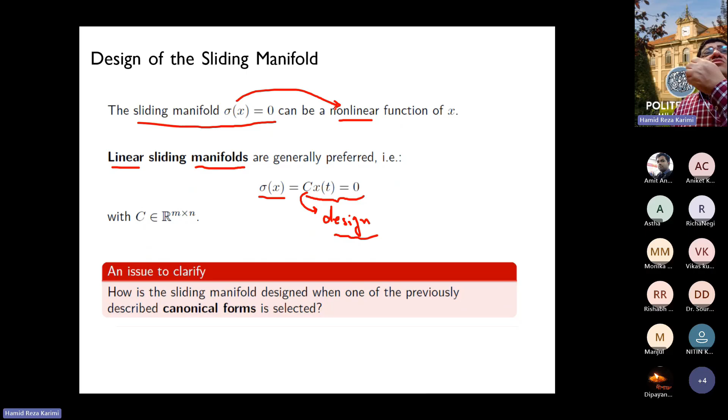There is one issue we need to clarify: how is the sliding manifold designed when one of the previously described canonical forms is selected? If you remember, we talked about four types of canonical form in our lecture before. Now the point is, if you have one of these particular canonical forms, how can this sliding manifold be designed? This is one question.

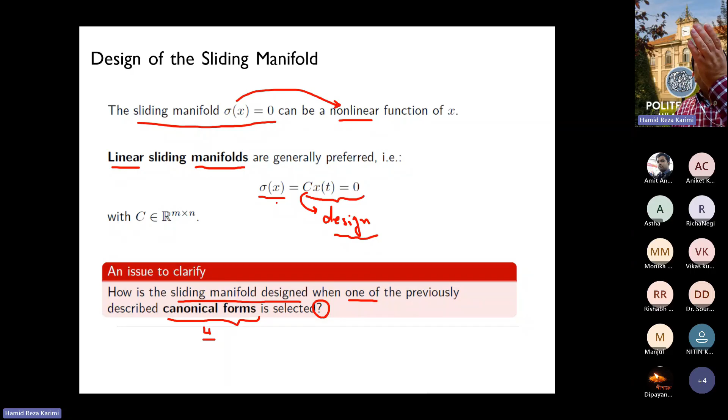Basically this question means you are talking about some classical control design, such that you have a canonical form in the system model, in the dynamics, and you try to design the sliding manifold based on this strategy. So in this case, let's look at the design of sigma x for the canonical forms, starting with the reduced form.

You remember the first technique we taught was the canonical form in the shape of the reduced form. We know that if you look at the state vector, it can be split into x1, x2 — so your vector x can be represented like x1, x2. You can split it into two parts, and then you can design sigma x like this: sigma x is composed of x1, x2. And remember that sigma x should be C multiplied by x.

This was the linear shape. So now x is x1, x2 — this is x1, x2. And the matrix C can also be partitioned into C1, C2. Therefore, this could be the representation.

Okay, but if you're doing this, you want to reach the reduced form as a function of x1. So remember that the reduced form should be in the function of x1.

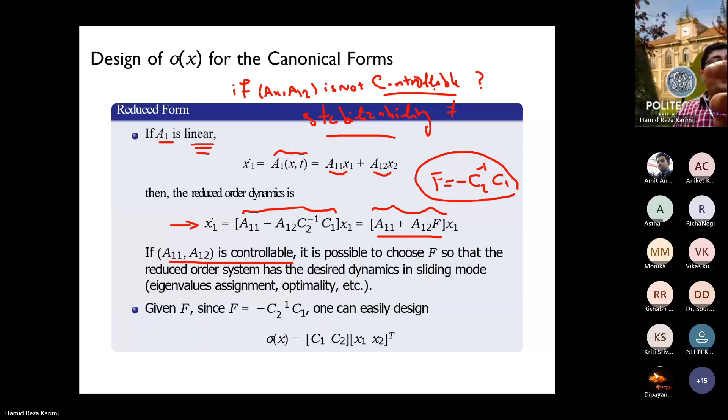Controllability means this matrix A11, A12 should follow some rank formulation, as you know from the control course. If this controllability matrix has complete rank, the system is fully controllable. But if it's not controllable, you need to check stabilizability.

I can give you one example of what stabilizability means. Assume you have a function G(s), equal to 1 over (s plus 1) multiplied by (s plus 2). If you have such a transfer function and you find the matrices A and B, you can see that this system is fully controllable, so it's controllable, you can find it as controllable.

But if I give you another function, for example G(s) equal to (s plus 1) over (s plus 1) multiplied by (s plus 2), this transfer function simplifies to 1 over (s plus 2), because s plus 1 cancels out. So what happened here? This system is not controllable.

Why? Because S plus 1, so it says that S minus 1, so this mode is not controllable. It means that this mode you cannot control.

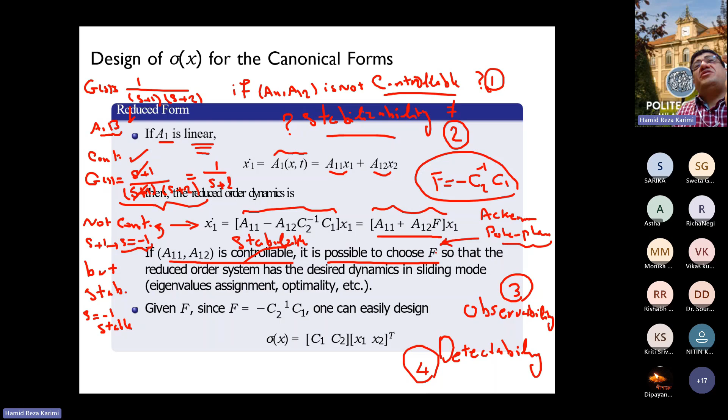So now when you choose F, you have two parameters, C1, C2, then it's up to you how to choose C1, C2. Based on C1, C2, then you will get the Cx. So sigma x is the design. It means that you can design it, you can construct it. So this is the main idea, the main philosophy for choosing sigma x for the reduced form in the canonical form.

Okay, so another form was the controllability form. You remember that the second canonical form is the controllability form. So what does it mean? If you remember, in the controllability form, the system can be split into m subsystems.

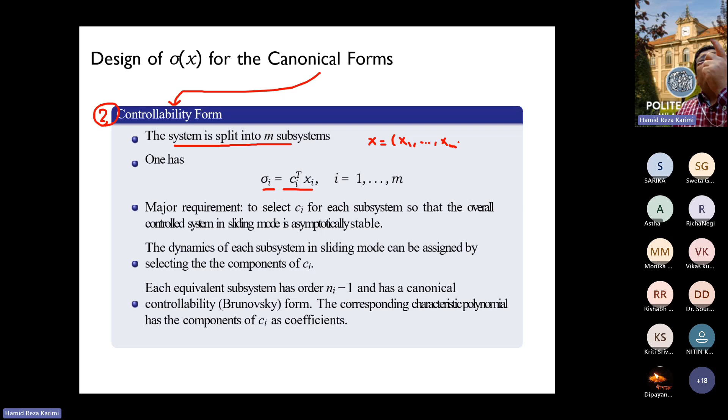It means that you can split the system into several subsystems, for example m subsystems, and then sigma I. For each subsystem from 1 to m, it can be designed from this formulation, Ci transpose xi. But you need to remember that here the vector x can be composed of several, x1 up to xm. So this is several subsystems.

And then each x1 has a dimension n1, for example, and xm has another dimension like nm. So now the whole dimension should be equal to dimension n for the vector x.

Okay, so now the point is the major requirement, how to choose CI, because here you need to choose CI for each subsystem. You need to choose CI such that the overall control system in sliding mode is asymptotically stable. So it means each subsystem should be stabilized, depending on the choice of CI. So the dynamics of each subsystem in sliding mode can be assigned by selecting the component of CI. Okay, so the question is how to choose the parameter of CI.

So now each equivalent subsystem has the order ni minus 1. It means that this is the order for each subsystem. So it has such an order, and it has a canonical controllability form. And then you can find the corresponding characteristic polynomial, which has the component of CI as the coefficient.

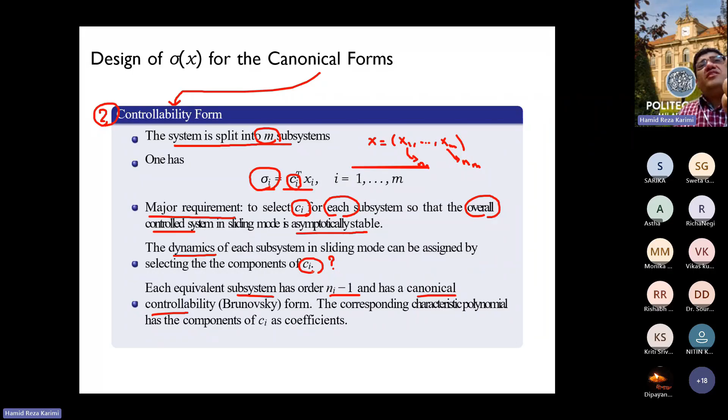Okay, so this is just the partitioning. You need to partition X into several subsystems, like m subsystems. And then for each subsystem sigma I, you need to find CI. So the question is not how to find CI, but you need to choose CI in such a way that each subsystem should be asymptotically stable.

Another form we discussed in our previous lecture was the decoupled input-output form. When we talked about this, you need to look at the degree of the system, and it's very similar to the case of the controllability form. The approach here is also very similar to the controllability form. You need to look at the relative degree R, meaning each subsystem has a different relative degree R1 to Rm. If R equals n, the order of the system, then you can find this shape.

For this system, you need to find the decoupled input-output form. In this shape, you take R-i derivatives from Yi such that Ui can appear. This is your decoupled form, and it is very similar to the controllability form, so you can basically apply the same idea for this case. The decoupled input-output form is also very similar to the controllability form.

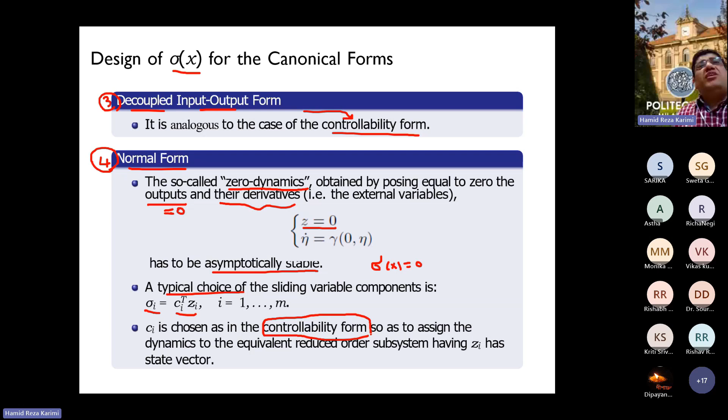You need to find some zero dynamics, like eta, which represents the zero dynamics. If you want to design sigma x for the canonical form in the shape of the normal form, you need to choose it so that the zero dynamics are asymptotically stable. A typical choice for a sliding variable component for sigma x: you can choose sigma x equal to zero, or sigma I like this, sigma I equals Ci transpose Zi. But remember, Ci is chosen as in the controllability form. If you understand the controllability form, you can easily handle the decoupled form and the normal form, because the selection of Ci is very similar to the controllability form, to assign the dynamics to the reduced order form.

This is another basic canonical form, and it's very important because zero dynamics is very important in control. Why? Because the zero dynamic is an internal dynamics, and it brings the output to zero. If you don't control it, the system becomes in a very critical situation. Therefore, stabilization of the zero dynamics is the first thing we should do, and you can asymptotically stabilize it by choosing sigma I in such a way.

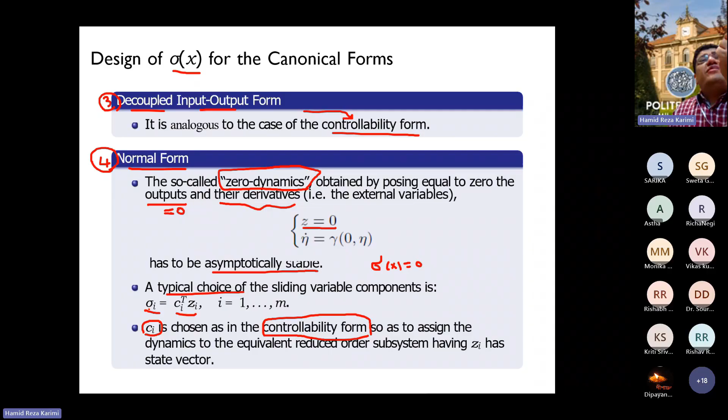Now, the existence of the sliding mode. After the design of the sliding manifold, it is necessary to guarantee the existence of the sliding mode. We need to look at how to guarantee that the sliding mode exists. A sliding mode exists if, in a vicinity of the sliding manifold sigma x equals zero, the vector tangent to the state trajectory of the control system is always directed toward the sliding manifold. This means that if the state hits the manifold, the tangent should always be in the direction of the sliding manifold, and this means that the sliding mode exists.

Around the sliding manifold sigma x, the vector tangent to the state trajectories is always directed towards the sliding manifold. This means the state should remain, after some time, stabilized on the manifold. If this condition is satisfied, then we can guarantee that the state can be stabilized and remain on this manifold.

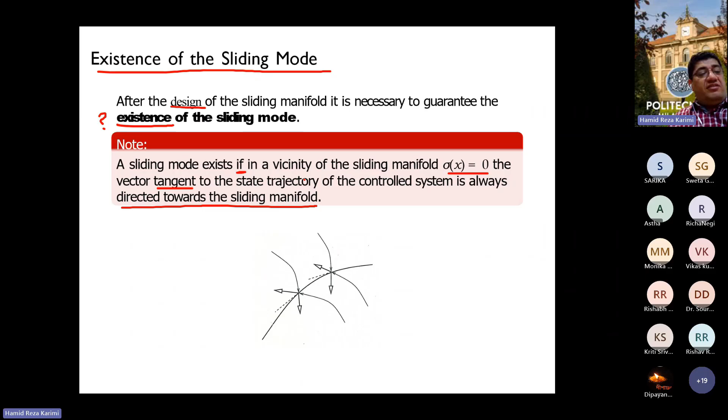Okay, so now the existence of the sliding mode, basically the ideal and practical sliding mode. So what are the ideal and the practical sliding mode?

The ideal sliding mode is enforced if the state trajectory of the control system is such that sigma x equals zero. It means that if the reaching time... for example, if this is your sigma x, from the initial condition x zero, if the state arrives to this at time tr, this is the time tr, x at time tr. So after tr, for each t bigger than tr, the state should remain on the sigma x.

Basically this part is the reaching time. Reaching time is this, and this time is the motion time, or we call it the sliding motion. So this sliding motion, or the chattering, should be controlled. This is basically the ideal case. Of course, we would like to keep it as close as possible to zero.

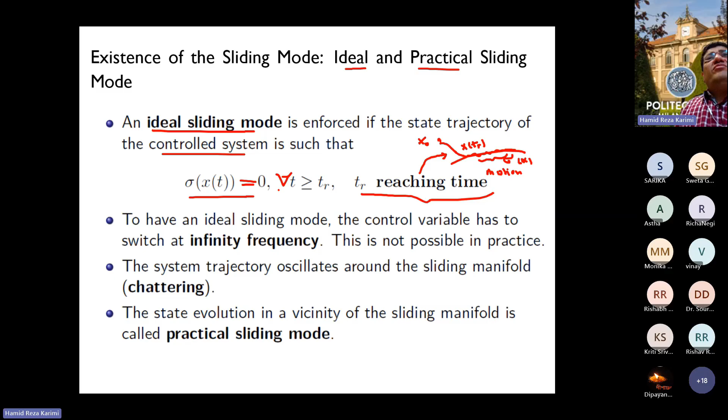But to have an ideal sliding mode, the control variable has to switch at infinite frequency. So this is not possible. So basically the ideal case may not be possible, and therefore we should say that sigma x should be approximately zero. This approximation means this kind of motion, and in sliding mode we call it chattering. So now the topic of chattering comes onto the table.

So now in this slide there are two pieces of information. One is the reaching time, tr. The other is about the chattering. The chattering is for each time bigger than tr. So now what is the task?

The task is that first you need to bring the state to the surface. This is phase one, the first step. And then you need to design the control in such a way that it arrives to the surface in a short time. And then the chattering also should be controlled.

So a state evolution in the vicinity of the sliding manifold is called the practical sliding mode. So now you can see that the PSM, the practical sliding mode, also represents the chattering. So you need to remember how you are able to reduce this oscillation, how to reduce this oscillation.

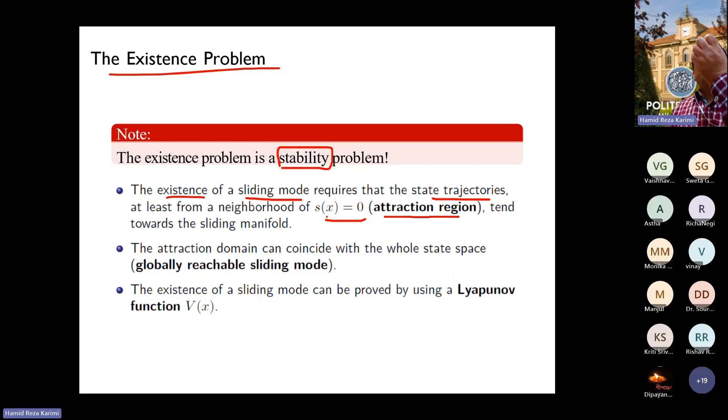Existence of a sliding mode requires that state trajectories, at least from the neighborhood of S(x) equals zeros, meaning the attraction region, tend toward a sliding manifold. So the system should attract, the attraction region around this neighborhood of the sliding surface, basically everything should be pushed toward the sliding surface. This is the requirement for existence of this sliding mode.

The attraction domain depends on which initial condition, where your state at this moment exists, because maybe you cannot do it for any initial conditions. For some initial conditions, such that a state is around the neighborhood of S(x) equals zeros, this attraction domain can coincide with the whole state space, and then you can basically predict it globally.

This is very important. If you want to have a globally reachable sliding mode, it means that for any initial condition at time zeros, for any state at time zeros, you want to achieve such stabilization. If you want to satisfy reachability for all the global state, and your attraction domain can coincide with the whole state, then you have global reachability.

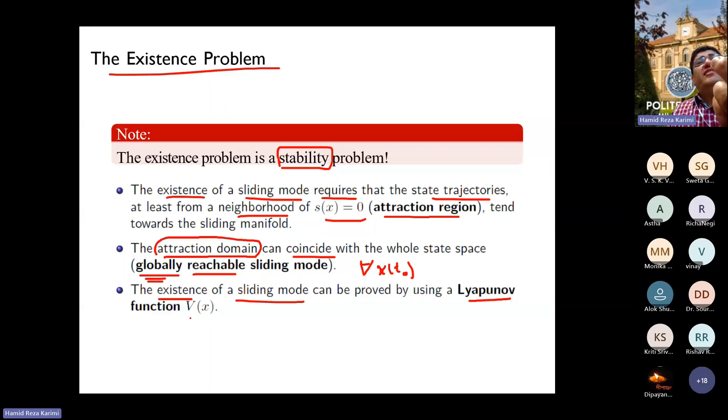Existence of a sliding mode can be proved by using the Lyapunov function. For stability, we always use the Lyapunov basis, and therefore you need to choose your V(x). The Lyapunov function V(x) should be designed, and how to design it is the task. So the first step is existence for a stability problem, meaning that you need to choose the function V(x).

Now there is a lot of research. Many researchers develop many Lyapunov functions, and if you choose a new Lyapunov function, then you can design a new control. Therefore, the main task for researchers in this area is to pay attention to how to develop a less conservative Lyapunov function. If you choose a less conservative design, you can reach more global results, for example in reachability. So basically this means we need to pay attention to V(x), and this is a very important task.

So the one simple V(x) - one of the simple choices - why not choose it against sigma(x)? Because you remember that sigma(x) is one variable, as a sliding manifold. So why not choose V(x) based on sigma(x) in the quadratic form, okay, the half of sigma(x) squared. This function is basically positive.

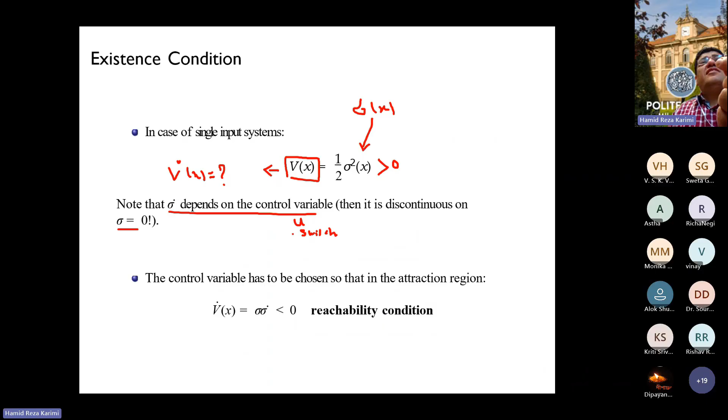And also you can check out what is V dot(x), okay, this should be calculated. You need to remember that sigma dot depends on the control variables, then it's discontinuous at sigma zeros. You remember that sigma dot depends on the control variable u, and u has some switching. Because of this switching, at sigma equals zeros there is some discontinuity. We need to remember this point.

But if you want to take a derivative, the control variable has to be chosen such that the attraction region, the V dot(x), this relation should be satisfied.

So, one question for you: how to calculate v dot x? v dot x is dv over dt. For example, dv over dt is v dot x. But dv over dt, because your function depends on sigma x, we can say that dv over dt is equal to dv with respect to d sigma, multiplied by d sigma over dt. This is basically the chain rule from mathematics.

By using the chain rule, dv over dt is equal to dv with respect to d sigma multiplied by d sigma over dt. So dv with respect to d sigma, vx is this, and the round of v respect to sigma is equal to half multiplied by 2 multiplied by sigma x. This becomes sigma x. So the round of v respect to round of sigma becomes sigma x, multiplied by round of sigma over dt, or d sigma over dt, which becomes sigma dot.

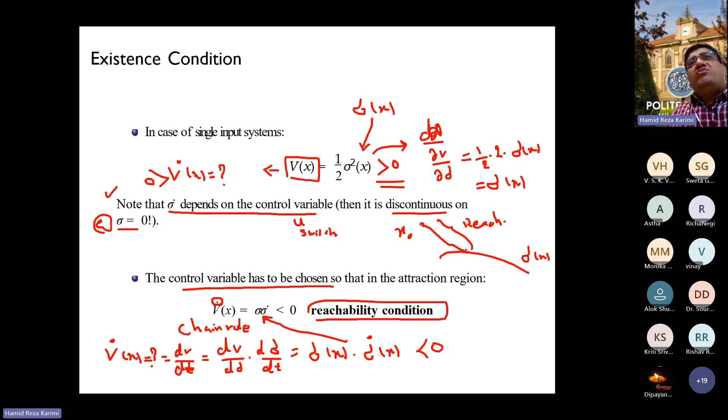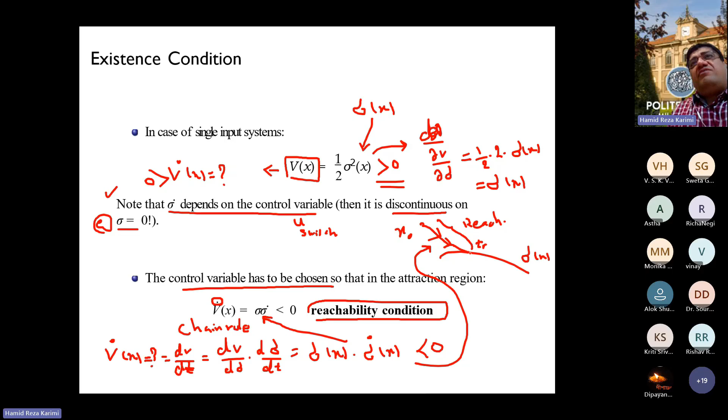So this was basically the reachability condition. If you want to keep satisfying this condition over time, you can satisfy it, meaning your state trajectories can move toward the surface. But of course, after this, there could be some sort of chatter.

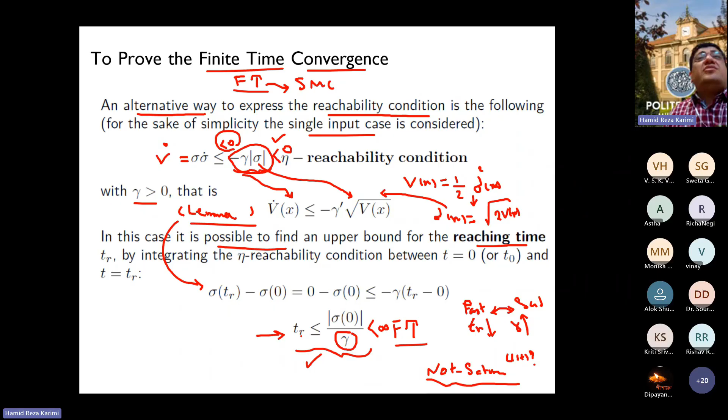Okay, any question up to now? Okay, if there is no question, then I can also show you some other results about sliding mode control.

Okay, so I want to show you some new results. So basically, okay, now I want to show you a little bit how this kind of sliding mode control can be added to network control, and also with some complexity from CPS.

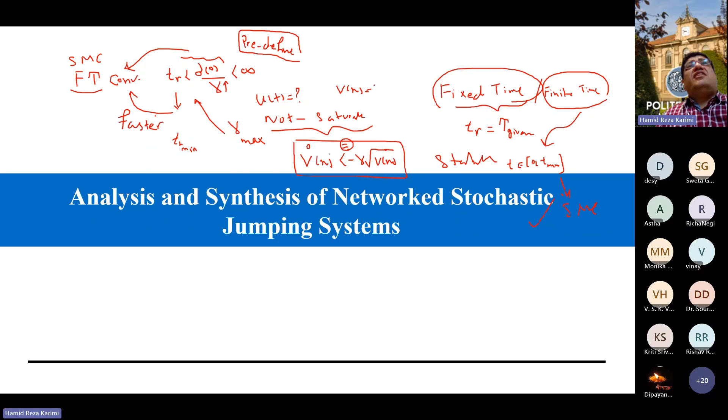But if your target is a fixed time, for the given time or the predefined stabilization time, then you need to see how to make it, because this condition needs to reach equality - you need to satisfy it for exactly the same function. But I can tell you that predefined or fixed time can also be possible by doing some modification of the Lyapunov function, because this Lyapunov function V(x) can only give you basically the finite time.

But if you want to reach the fixed time or the predefined time, we need to modify the Lyapunov function in such a way that we can reach the exact time. So what is the problem? The problem is that if your fixed time becomes less than TR min, for example, if the fixed time is less than the TR min, this is a problem.

This is a problem because you cannot go below this value. If you go below this value, then you have a saturation problem, basically for the control signal UT. Therefore, if you want to avoid this condition or this problem, you need to come back to your Vx and try to modify it.

Now there are some publications - I remember one of my PhD students also published a few papers about this predefined and fixed time control. I can send you this publication. But in fact, the main task is to modify the Lyapunov function in order to solve this problem. As I told you, this is a very good and interesting formulation.

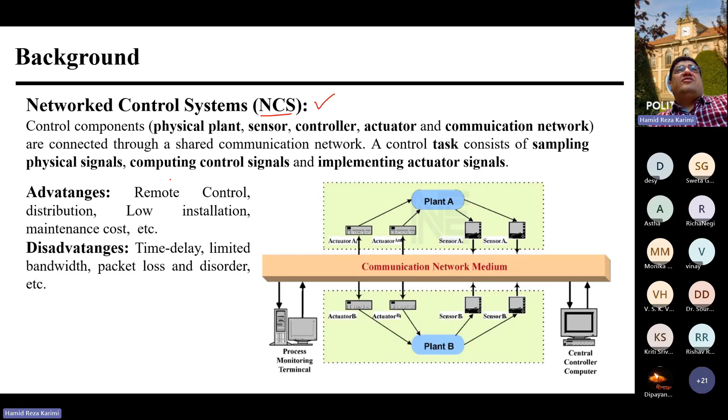Okay, so let's show you some results about sliding mode control and some complexity. So I told you about NCS - I think you know about it. We discussed it before about network control advantages, and we discussed about CPS, and we also looked at challenges about state awareness, data circulation, real-time analysis, scientific decision making, and precise execution. We also discussed computation control.

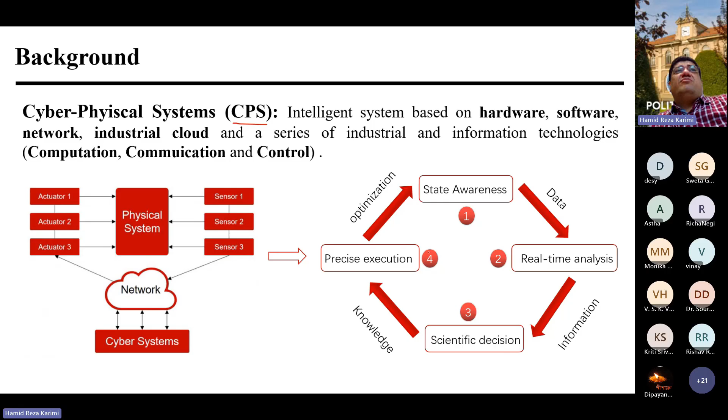But when it comes to the basic CPS and network control, we know there are three parts: the plant, the network, and the control. I showed you, we discussed these three problems in the last lecture. But what I want to tell you today is about some complexity in the plant, because the first part in the CPS or NCS is the plant. The plant is number one - it means how to model it.

Sometimes the dynamics are a bit complex. That's in my research, because I did a lot of research on this kind of system - a Markov jump system, MJS, or semi-Markov jump system, SMJS. Usually there are many CPS systems that can be modeled as a Markov jump or Markov chain. The status of the system is changing.

The physical system may suffer from abrupt structural change, for instance, in sudden environmental disturbance or unexpected change of the operating point or parameter shifting. For example, in the circuit, if there is such a switching between 1 and 2, this switching means you are jumping - there is a jump from 1 to 2, or vice versa. This kind of jumping from 1 to 2, and also from 2 to 1, or maybe the system remains at the same status, but this is a probability.

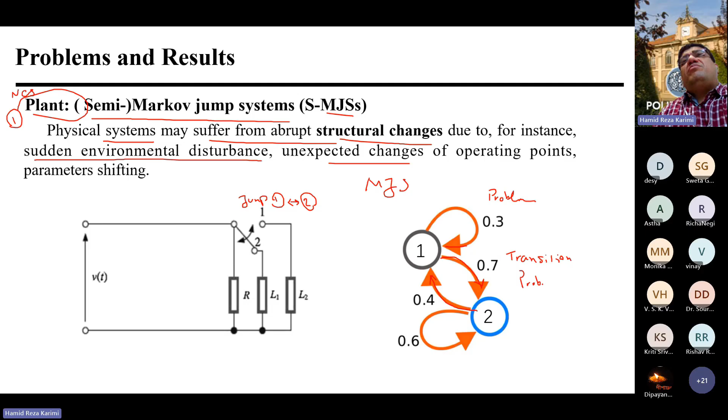Okay, the transition probability - we call it the TP. So for the TP 0.7, the system goes from 1 to 2, or with probability 0.3, it remains at 1. So now you can see that 0.3 plus 0.7 equals 1.

And this is also okay from mathematics. So for system number 2, it goes with the TP 0.6, it remains at the same system, but with 0.4 it goes to here - again the summation becomes 1. But I can tell you something about Markov jump.

Markov jump has been developed a lot in the past. I did a lot of research maybe 10 years ago, or even more, 15 years ago, I did a lot of research on Markov jump. And currently my students are also doing a lot of research on Markov jump.

But I can tell you there's one problem. These are the information - 0.3, 0.7, 0.4, 0.6 - these are the information. But in total, this information doesn't exist. We don't have it. So if we don't have this information, what should we do?

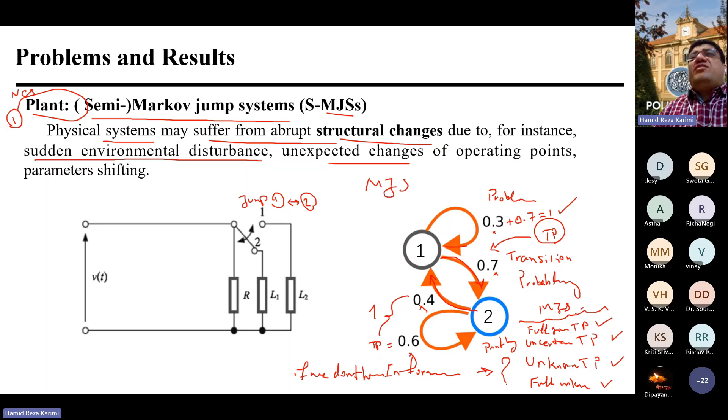For the full given information - it means if your information for TP is given, or is partly uncertain, or partly unknown, or even fully unknown - for all of these cases, you are able to do research and try to model your CPS, and then try to apply different control strategies. So if you are interested about this, you can contact me, because as I told you, this is one of our research areas.

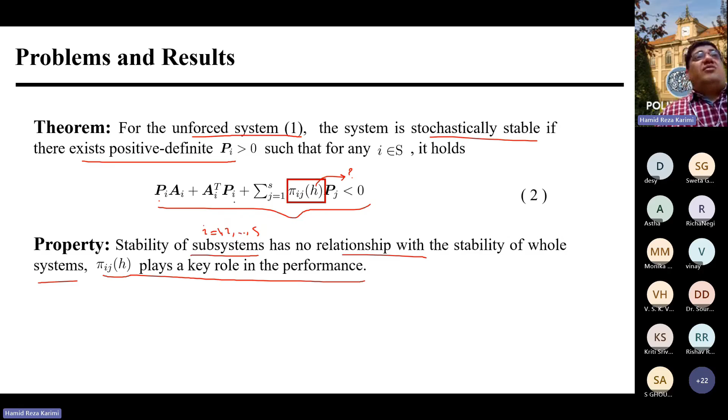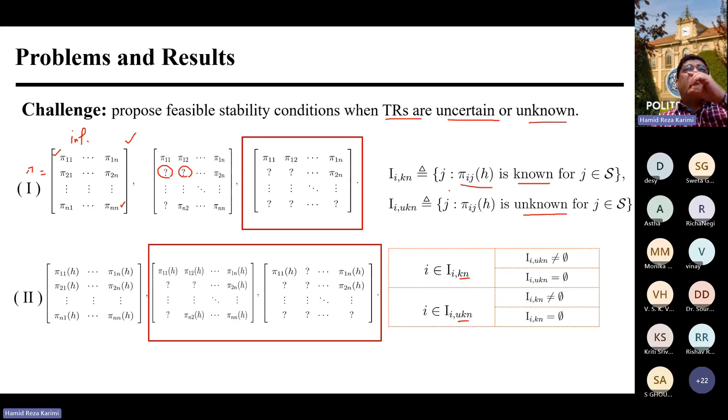I want to tell you something about sliding mode control, SMC, for this, and that's it, I'm going a bit faster. But if you're interested in this particular case, you can look at these publications, because we have done some research about stability for these different cases of the Markov jump. This is just for your information, you see that for different cases you can also develop some conditions for stability. These are some conditions for stability, and of course you can find more from these references.

The one thing I also want to tell you about is network control in the context of CPS. We talk about time delay as a network constraint, and we talk about packet loss and packet disorder. This means that if there is network traffic congestion or packet transmission failures, network delay, this delay can give some disadvantage like poor performance or even instability. Packet loss can also give consecutive packet loss, so there could be some disconnection of the network.

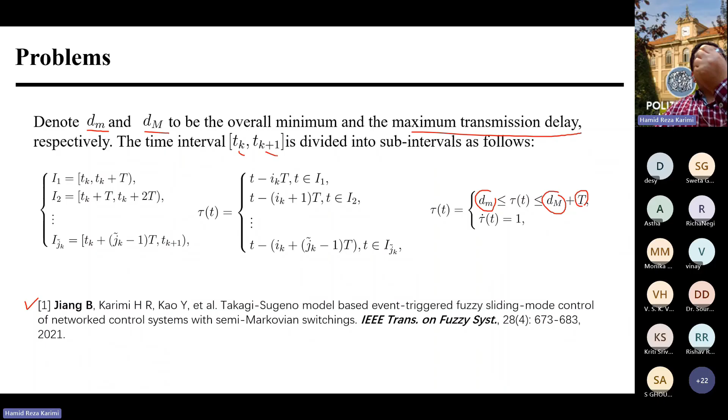What does it mean? It means that for the time interval from tk to the next sampling time, tk plus 1, we try to divide it into some sub-intervals based on the parameter T. So you can see that interval I1 is from tk to tk plus T. I2 is from this sampling time to this time. So in this case you can divide it into several subsystems.

And then this is a very interesting part, the time delay modeling for each subsystem. For this interval, the time delay can be defined like this: t minus ikT. For this part, the delay can be defined like this, and for this part, the delay can be like this. So this is basically the modeling, how to obtain the model of the time delay for the network system.

For all of these delays, they can satisfy this condition: it is always bounded, and also the derivative is 1. If you need, you can find more details in this publication.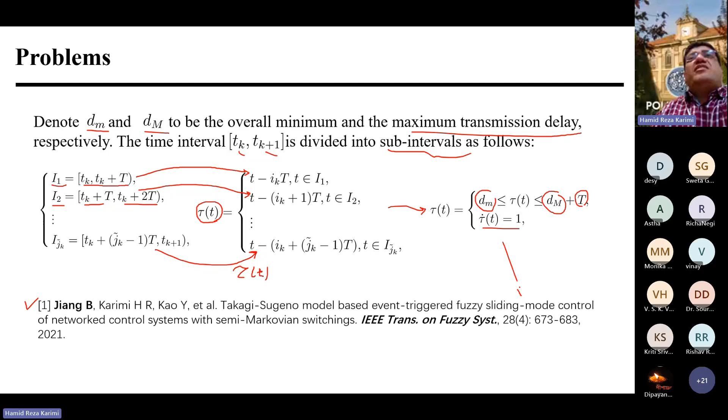So now we come back to improving network efficiency. The first thing is we need to look at time triggering control. Remember that this TT strategy, time triggering strategy, is a very simple case to send data over the networks. But in time triggering control, the control task is executed in a periodic way, so now you have periodical sending of data over the networks.

But TT has a problem. The problem for TT control is wasting computation and also energy resource of the battery. So time triggering control is not a very popular approach because it has higher computation time and also energy cost, because the system should be executed in a periodical form. You can occupy the bandwidth, but you cannot reach the optimal usage of the bandwidth, and you could expect some congestion in the network traffic.

So therefore, in the context of network control, for example here and also here, you need to decide, because if you have the data XT and here you have a sampling time XKH, how to send the data over the network? Of course one issue is delay. There are many protocols to send the data. One is TT, but we have also some other approaches we can discuss.

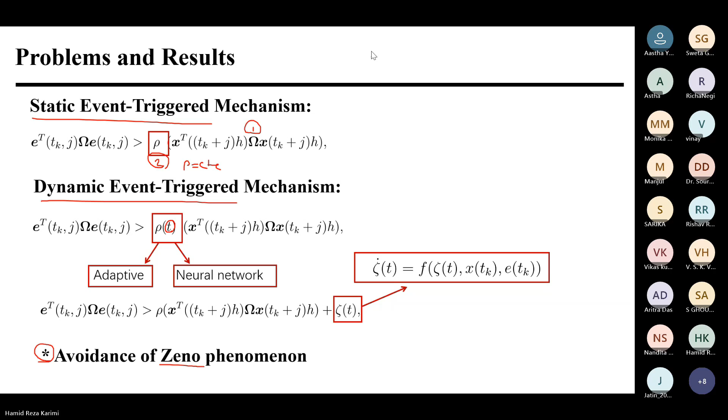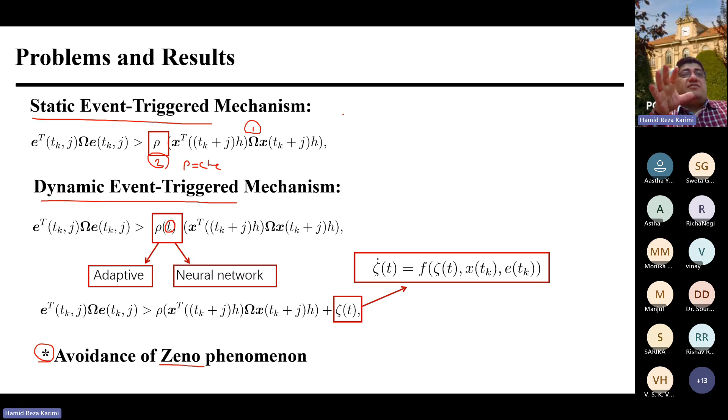In this part, I try to bring your attention to one complexity in the modeling from the Markov side. The second challenge was about the network side, and then how to mitigate the complexity of the network in order to enhance the network performance. We can also look at some new technology based on the triggering strategy, either time trigger, event trigger, or even self trigger strategy. We will come back again to this topic in another lecture, but this was just the introduction to the triggering mechanism. The important thing for us is to look at the mechanism of sending and receiving data over the networks.

It means that we need to look at the same mechanism for the parameter rho t and also the omega, as we discussed before. So it means that maybe you have rho I, for each event trigger mechanism, you have a different parameter rho I. Okay, so now you have this data.

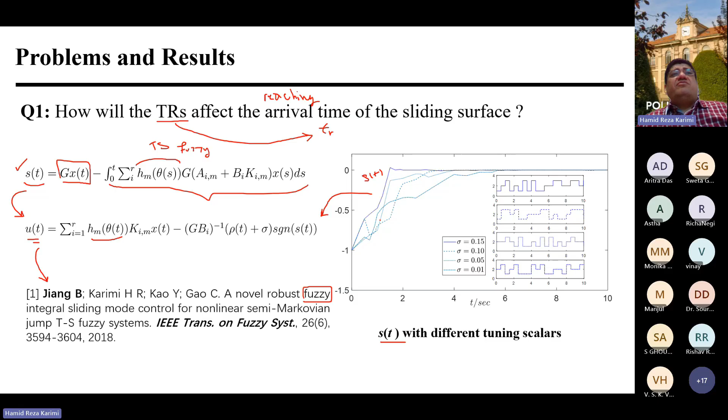So for both questions, if the TR affects the reaching time, based on this different sliding surface, if we want to design the TR dependent SMC, for all these cases we can find the control signal based on a sliding surface. But the sliding surface again is very interesting because the sign function exists.

But as I told you before, if you want to reduce the chattering, you can approximate it. You can approximate this with S divided by the norm of S plus epsilon, okay? And then you can get less chattering.

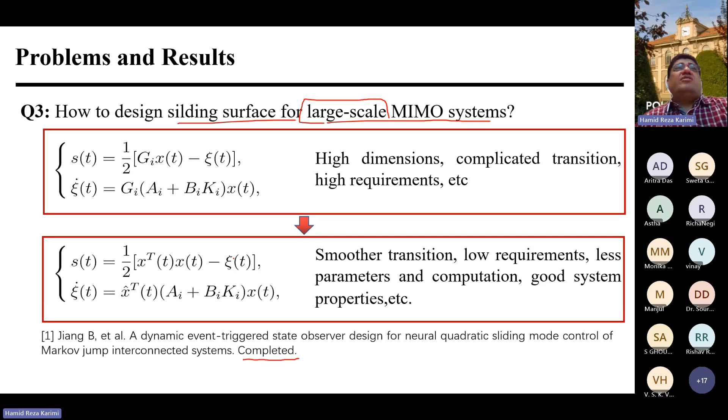So for the large scale model, how do we approach sliding surface design? We can do some modification like this, or address other challenges from the system. I tried to give you part of the difficulties we have from the system point of view and how to connect that to the control design. So this was this part. If there's no question, I can talk about another topic. Any question?

Sir, what is the effect of chattering? Sorry, what is the effect of chattering?

The effect of chattering is destroying the system resilience in terms of lifetime. If chattering exists in the system, there's always fluctuation. Fluctuation means the control signal has a lot of fluctuation, and over the lifetime of the device it can destroy the lifetime or the performance. Another problem with chattering is the unmodeled dynamics.

I think it's a very good question, so maybe I can write it here. Just a moment, let me write it down on the surface. So this question you asked me is a very important question.

So if I want to answer it like this: the chattering has a bad effect over the lifetime of the system, because the system can get some troubles after long term operation. The second problem is the unmodeled dynamics — we call it the unmodeled dynamics.

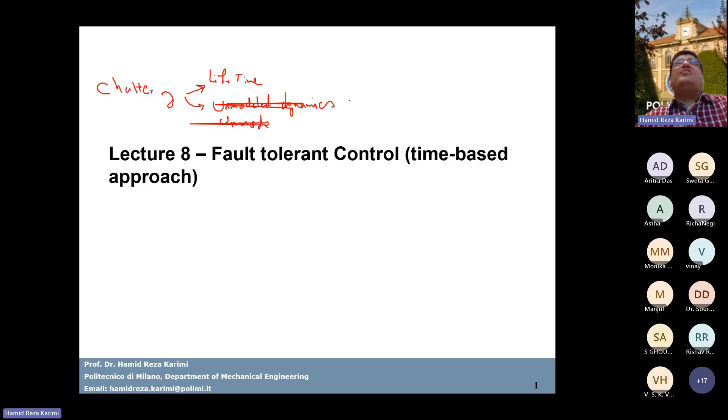So this is the unmodeled dynamics. Let me write it here. Unmodeled dynamics means that, for example, when you say x dot equals Ax plus B.

So this is your system, based on some information from the matrix A. But maybe you have ignored some dynamics, like xi, for example, which is equal to A1 x plus A2 xi. So we call xi the unmodeled dynamics.

It means that this dynamics has not been considered in your formulation. So when your control signal is designed based on SMC, and if it has chattering, in fact maybe some dynamic has not been modeled in your formulation, but they exist. So I can give you one example.

X could be the position signal, for example, and xi is maybe some dynamic from the electrical machine. Now if you have neglected these dynamics in your control design, but in reality they exist, unmodeled dynamics in reality exist.

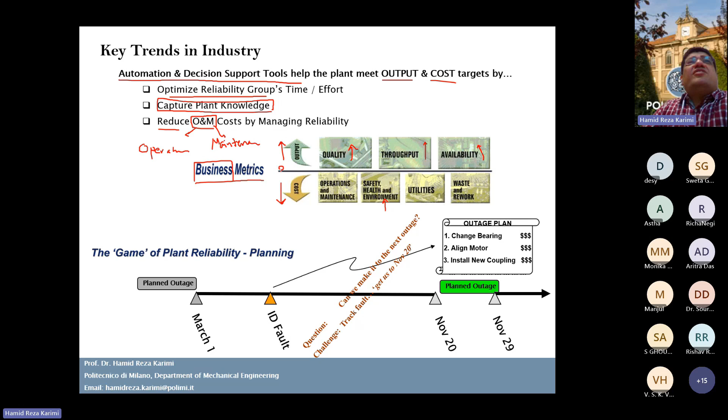But what is the question for the business? For the business, it means they should find a trade-off between the cost and the output. So this looks like a game - we have a game of plant reliability.

Let me give you an example. Assume you go to a factory, and they plan a plant outage for March 1st. They made planning for the outage around November, for example, after 6 or 7 months. But there's a question: if there's some identification of a fault, some ID fault occurs at this time, can we make it to the next outage?

Because the company has decided to do the outage at this time, but suddenly you get fault features at this time, maybe around May. In May you get this fault information, but now there's a question for the company: should we continue to the next outage, or should we stop and try to solve it?

This is a challenge, because the challenge is the cost. In the business, the big challenge is the cost. If they want to stop it, there's a lot of cost for the company, because there could be different types of faults, and different faults have different problems. So now the company should make a decision.

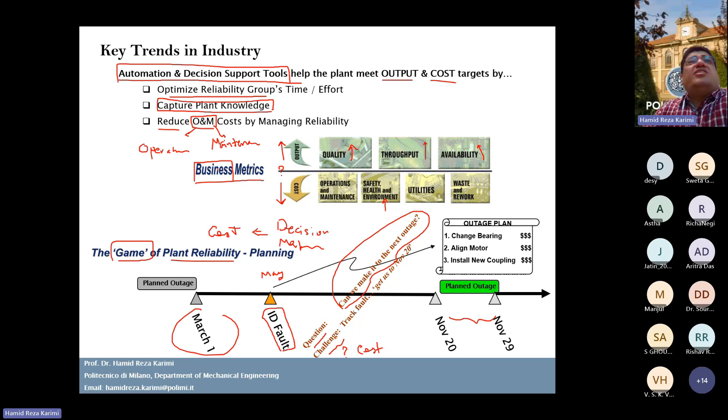So in the topic of fault diagnosis and fault control, we have a big issue about decision making. This is a very important topic, because decision making means, again, the cost. Now, to solve this problem, we need some additional tools - automation with decision supporting tools. How do we use this information to solve this problem? We need to look at a category of health management systems.

So the health management system was introduced for aerospace. If you go to some business or companies related to aerospace, the health management system was first applied there. It has 5 sections.

The first section is about incipient failure detection. It means how to detect failures even before they substantially affect performance, so you can detect the failure at the earliest possible time.

The second part is you need to prevent fault progression. It means that for fault conditions, before secondary faults develop, you need to prevent it.

The third topic is about the prediction of progression from fault to failure. This is very important. You need to remember that if you don't control the fault and don't detect it, if the fault becomes a failure, that is a cost, because failure is a cost. A fault could affect the lifetime. For example, the lifetime, if the fault exists in the system, the life may be destroyed.

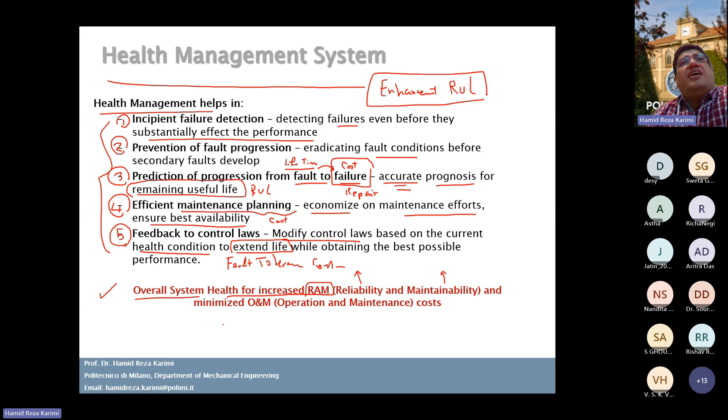So in total, as a conclusion, the overall system helps for increasing RAM. It means reliability should increase and maintainability should increase. At the same time, you need to minimize operation and maintenance cost, O&M. So in any business there's some conflict, because it's very difficult to enhance RAM and reduce O&M. How do you make it work?

You need to follow these 5 steps from number 1 to number 5. But of course, we are in control areas, and control is number 5, not number 1. Before control, you need to go through number 1, number 2, number 3, number 4, and finally you come to control.

So if you want to do research about fault, we need to follow a systematic approach from failure detection, prevention, prediction, enhancement, and control. In my research group in Italy, most of my PhD students also work on these, from number 1 to number 5, but mainly in this area.

In my research group, we are using AI, machine learning, artificial intelligence for this case. But there is no time to cover it now. If you are interested, you can contact me, because we are developing many algorithms for enhancement of this particular case.

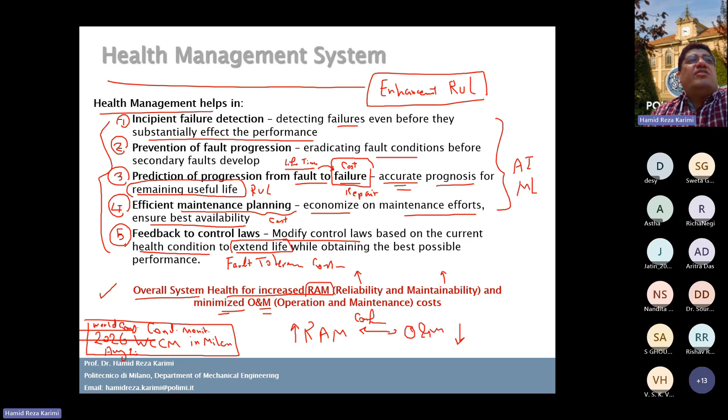Okay, so let's go back to the fundamental definition. The first thing we need to know is the fault.

So the fault has a definition: it is an unpermitted deviation of at least one characteristic, property, or parameter of the system from the normal condition.

Now the function f(t) should have some abrupt change. This is a permanent fault. Then maybe you have a transient fault for a short duration, or maybe the fault is an incipient fault, increasing with one slope. Or maybe you have an intermittent fault with different transient durations, occurring at different times, for example T1, T2, and T3. We call this the intermittent fault or even the multiple fault. So these are the different basic faults you can see.

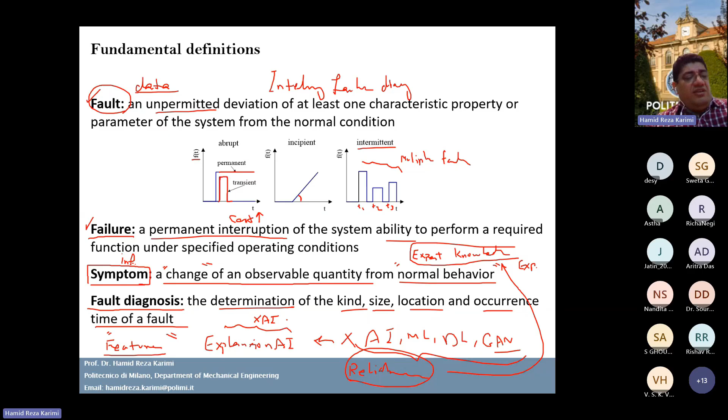So now you see we have several keywords about fault detection, isolation, identification, and accommodation. When you use fault tolerant control, FTC, you are doing accommodation of the fault because you're trying to handle it. But to do FTC, you need to identify the fault, isolate the fault, and detect the fault. There are several steps: 1, 2, 3, and 4.

If we do some diagnosis, it means detection, isolation, and identification together form a diagnosis. This is from the definition. Detection means indicating the occurrence of the fault. Isolation means determining the type or location of the fault. Identification means determining the magnitude of the fault.

If you are doing accommodation of the fault, the fault is self-corrected, usually through the controller. This is the topic of FTC.

So if you want to know why FTC is important and why we should do things before FTC, we should know we have two topics: diagnosis, meaning detection, isolation, identification, and then FTC, about accommodation of the fault. But as I told you, FTC is not the first part. The first part is this step, because if you don't have knowledge about the fault, it's difficult to design the FTC.

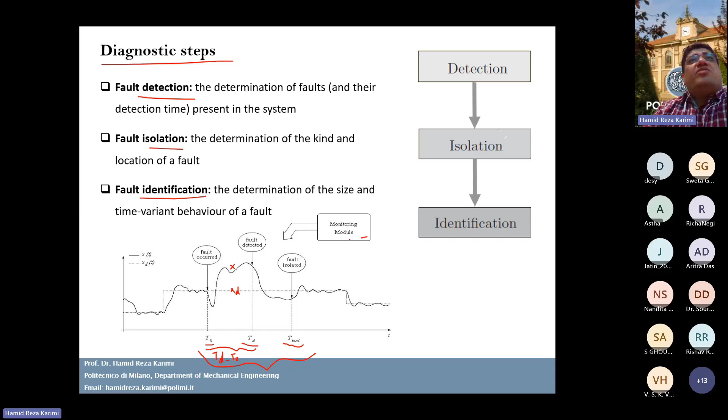We call this topic monitoring, or condition monitoring, and this is basic condition monitoring.

Next year we are organizing the World Congress on Condition Monitoring 2026 in Italy, where we will always be discussing all of these challenges.

When you look at the system from a system point of view, we assume we have a plant with a control signal and a sensor. Here you have a sensor, and then you have some information like a disturbance, so here you have noise. Also, you basically have some fault in the system, like f(t) as a basic fault.

Based on this control signal and your sensor data, you want to look at the fault detection case. To do fault detection, you need to process your data, based on residual processing. But that means you need some additional information, which should be created as residual information.

So what does residual mean? Residual means information, one example being the error signal. The error signal is y minus something, this could be y hat, the estimation of y. For example, you can put y minus y hat. So how do you get y hat? You need to add a copy of the system.

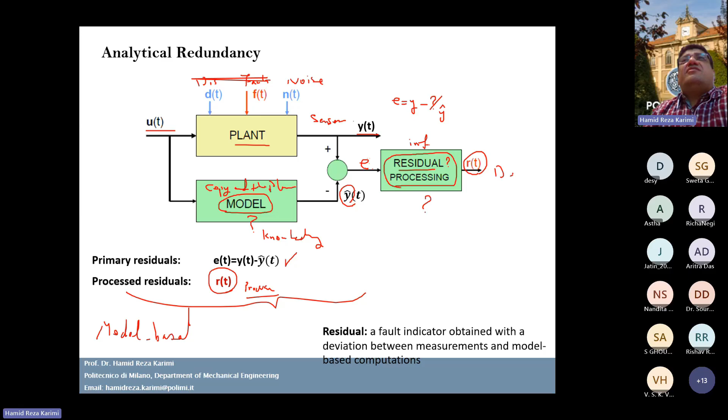The residual signal r(t) is coming after the processing. So now what is this processing? Sometimes, because r(t) is used to make a decision, after getting r(t) you need to make a decision. What is a decision? Decision means whether there is a fault or not. So you need to look at your signal r(t), which has been generated after this process.

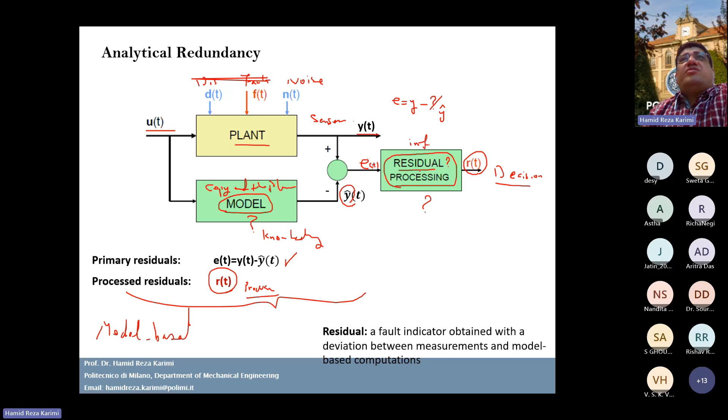So you need to look at your error signal and then do some processing after that. I will tell you later on.

Another approach is fault diagnosis as a two-step procedure. In this procedure, you have a plant. Maybe you have a fault F1, or a fault in the sensor FS, or a fault in the actuator FA. For all of these faults in the plant, sensor, or actuators, you need to get your information - the sensor information and also the control signal information.

You can take this information to an additional block as model-based fault detection. This means you need to get the plant model, and then get the residual generation, where you will get r(t).

If you want to get the decision, you need to do some residual evaluation. This residual evaluation depends on the type of signal. If the signal is stochastic or deterministic, there are two different evaluations - evaluation for a stochastic signal or evaluation for a deterministic signal.

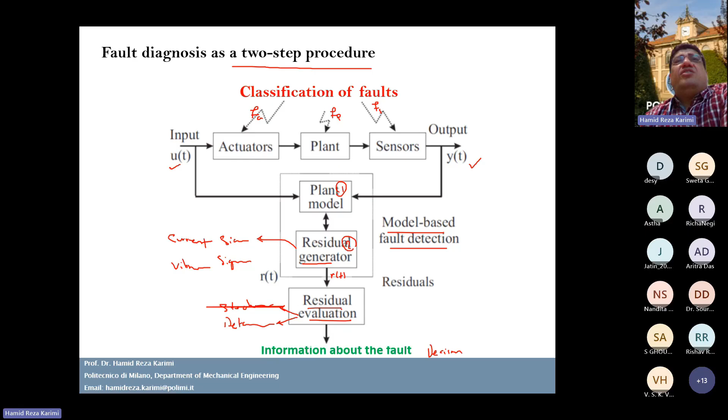If you finish the part of residual generation and find RT, then you can do the evaluation, and then you can get information about the fault.

Now, fault diagnosis and isolation with the control system - here, control becomes the main role. Again we have a fault in this process, for example a fault in the process, a sensor fault, or a fault in actuators. As I told you before, you can get information from the sensor and also information from the controller, to form one part as fault diagnosis.

In the fault diagnosis, you get information of U and also information of Y. Then the result of the fault diagnosis could also be given as input to the control redesign. Control redesign or control change is the FTC - fault tolerant control. So this is part of fault tolerant control, because it can directly affect the control design.

And then you can design, for example, control signal. So the benefits of this approach is to get early detection, gives higher availability. You can reduce the maintenance cost and also avoid wrong dosing.

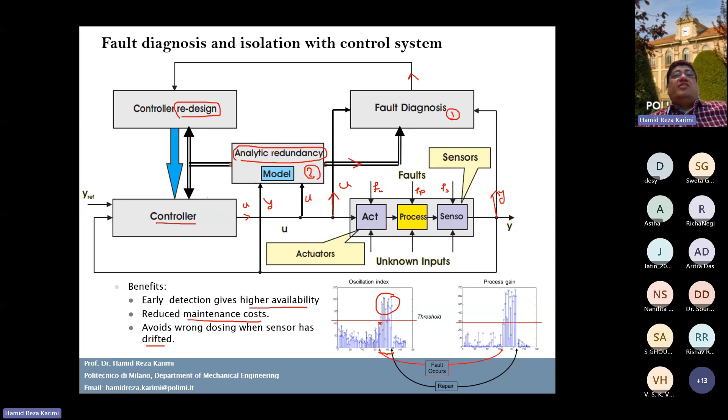If you do some processing on your data, you can see that, for instance, after this reconfiguration of the controller fault diagnosis, at this sampling time, the fault has basically been controlled, or the problem has been solved. So you can see there's a time frame where the fault exists in the machine, and all the points above this sampling threshold. The big question is how fast you are able to detect the fault in the machine. That's it — we can use this kind of analytical redundancy just to help us get the fault detected as soon as possible.

For the fault isolation scheme, there are different schemes: one is a dedicated scheme, one is the generalized scheme. In the dedicated scheme, we have a set of residual signals that can be generated, where each residual is sensitive to only one of the faults, because the residual signal R comes after a residual generation block. For example, you give the error signal to one block, and you get R — this is residual generation. So the point is that this signal R(t), if you are doing the dedicated scheme, should be sensitive to each particular fault.

For example, for fault number one, you can see that this should be, for example, R1, and at all sampling times it should be bigger than T1. What is T1? T1 is the threshold, and FIK is the fault — the fault for index number I. In this system you may have J or G number of faults, so for each particular fault you should have one particular threshold signal, and then you can satisfy this condition and use the dedicated scheme to detect the fault.

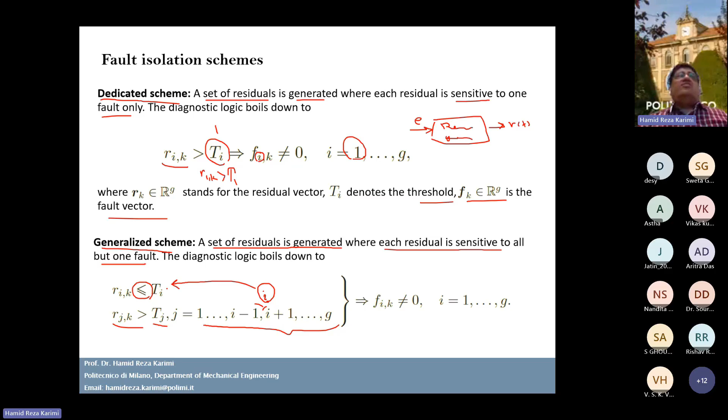And in this case, you can develop basically this scheme. Okay, so now you have this kind of fault isolation scheme, and then you are able to look at the detection part. So we have the topic of detectability and also isolability.

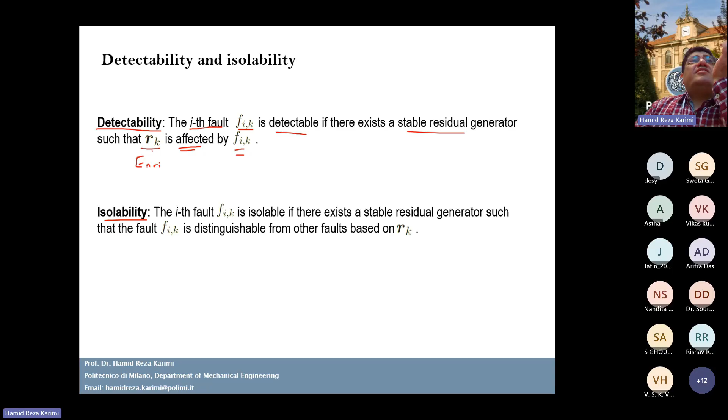So detectability means that fault number I, FIK, is detectable if there exists a stable residual generator RK, and this signal should be affected by FIK. This is very important. If you want to detect fault number I, you need to choose the right residual signal, because RK should be enriched, meaning it should contain information about the fault FIK. Otherwise, you are not able to detect fault number I.

So isolability means that fault number I, FIK, is isolable if there exists a stable residual generator such that FIK can be distinguished from other faults based on RK. Okay, so this is about isolability and also detectability.

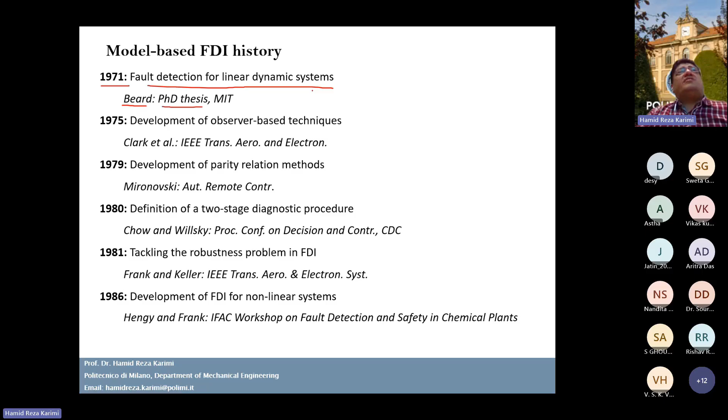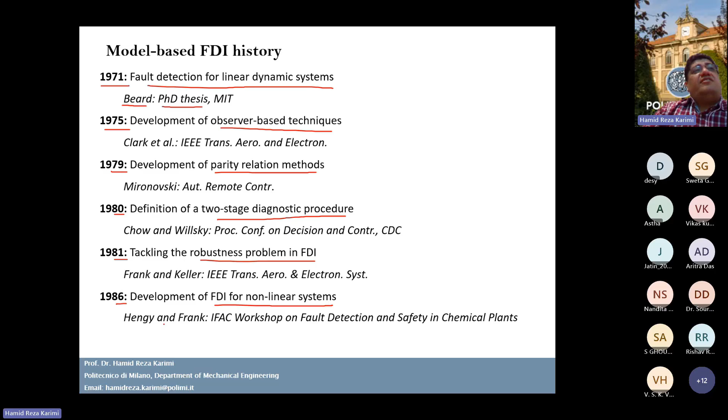1989, soft computing technique for FDI. 1991, FDI in nonlinear systems. And then you can see the establishment of IFAC SAFEPROCESS for fault detection, safety, and supervision. This conference, SAFEPROCESS, was built after 1991. And then from 91 up to now in 2025, you can see there is a lot of research.

But I want to tell you that both research approaches, model-based and also data-driven, are important. There is a lot of focus on the data-driven part now. Data-driven becomes more and more important, using AI, machine learning, deep learning, and so on. If you are interested, we can discuss more, because this topic has a lot of interest nowadays.

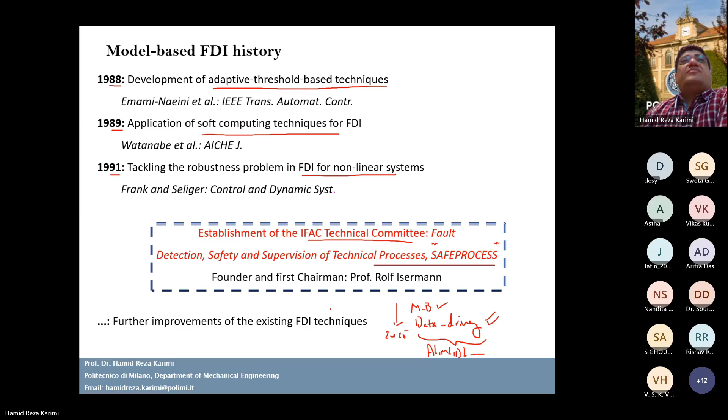So another important thing is residual generation, because after residual generation, you need to come to residual evaluation. Okay, so these are the two topics, and then you can make a decision.

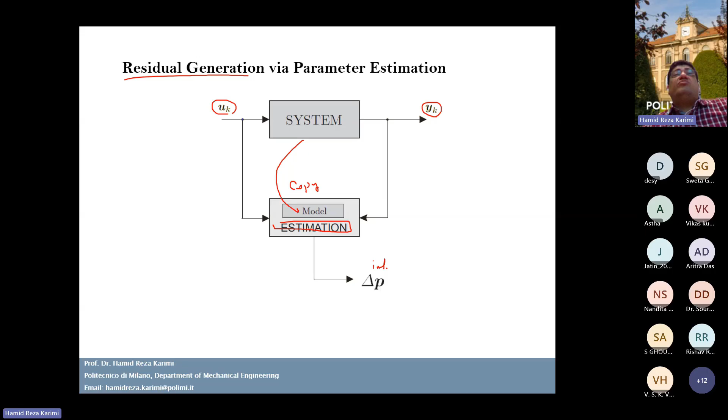Okay, I will tell you very briefly about residual generation. As I told you before, the two pieces of information, the input signal and the measured signal, you need to take into this part to make a model. The model is basically a copy of the system, and then you need to make an estimation to get delta P. So delta P is some information that you need to use for the residual generation.

Okay, so now I want to tell you how to make it. For this particular case, you use the input signal and the measured signal, and take them into this part to make an estimation of the model of the system. This should also depend on some change in the parameter estimation, so you get theta hat, the parameter estimation, based on the error signal et.

So here, in this residual generation via parameter estimation, first of all, the error signal is y minus y hat of theta t. This is y hat here, and it depends on theta and also depends on time. So for this model, y hat depends on B hat over A hat, multiplied by the input signal u(t). So this is your estimated model.

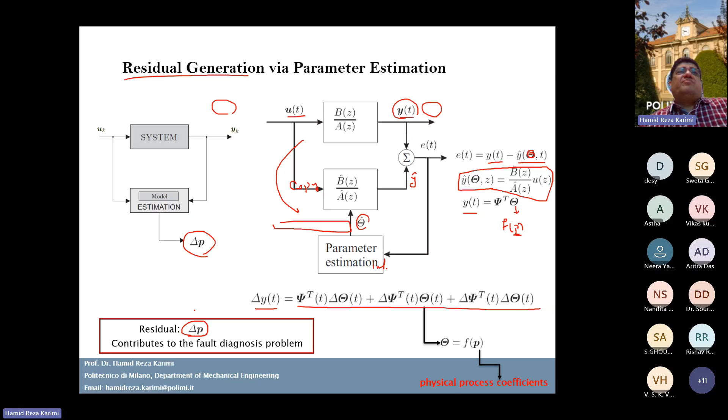This approach has some advantages and also some drawbacks. One requirement is that the model has to be linear with respect to the parameter. This is one limitation. The detection of faults in sensor and actuator is possible, but rather complicated.

Now you need a suitable transformation of the parameter deviations into the fault, which has to be determined. The detection or isolation of a parametric fault is very straightforward. This approach's detection or isolation is very straightforward, and a variety of online parameter estimation methods can be applied.

With this approach, you can use different estimation techniques. You can use the Luenberger observer, you can use the Kalman filter, or you can use the extended Kalman filter. You can use different estimation techniques basically for this part.

Another approach is the parity-based approach. The parity-based approach is one starting point toward the data-driven approach, because you can deal with the data, not with the model directly.

In the parity vector-based approach, analytical redundancy can be performed by collecting the sensor output in a data window. Here you need to get your measured data. For one time window, based on parameter S as the size of the time window, you can collect some data.

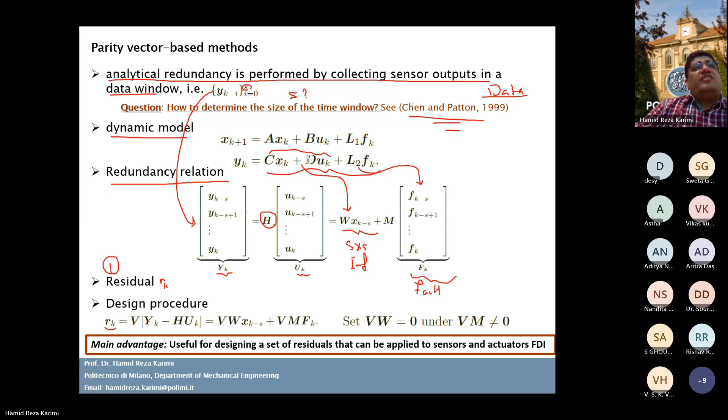So you could say that RK is equal to matrix V multiplied by YK minus HUK. If you write this formulation, because this is a procedure, RK is V multiplied like this, but we don't know what the V is, we don't know what the vector V is. This formulation becomes VW based on this mathematical model, so this can be written as V multiplied by W xk minus S, plus VM Fk.

But if you want to get this formulation, it's very interesting because the residual signal has some information of the system xk minus S and also information of the fault Fk. But if you want to get this condition, you need to set V multiplied by W.

If you choose the vector V such a way that VW becomes zero and VM is not zero, it's very useful because if VW becomes zero, it means the information of the state, the information of the plant, can be removed, and only the information of the fault remains because VM is not zero. Then if you do some analysis on RK, you can make a decision about the fault, because RK contains information of the fault, not information of the system.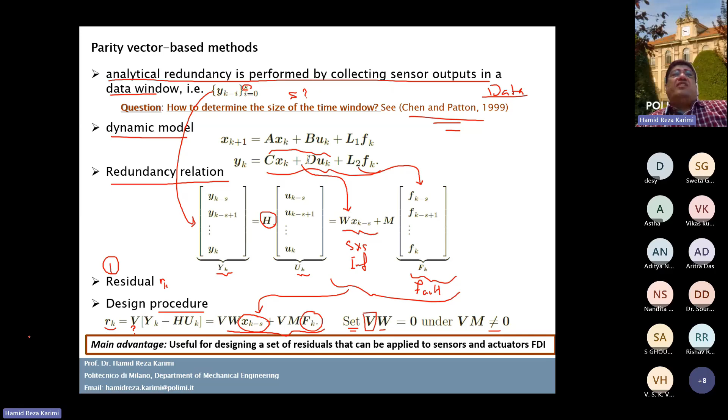Another approach is the observer-based residual generator. This approach is like this: here you have a plant, and this plant gives you YK, and this information of YK, you can bring the YK and also the information of UK to the plant.

Then here you can design the observer, so you can use the Luenberger or the Kalman filter, and then you can get an estimation of y hat k, which is c x hat k, and here you have y is cx. Then you can see that RK can be generated based on these treatments.

Here I can show you some formulation. Assume that this is the information of a state of the system, and this is the measured signal. Here you can see that the fault exists. Fk is the fault, and omega k is the noise. Without the noise, and then you have a fault, you have a noise.

For your information, if you want to do research on fault control or fault detection, it's important how to look at the noise. You need to deal with the noise because the noise at any time can make a problem and lead to a wrong decision. The noise should be controlled, and we need to make more consideration on how to deal with the effect of the noise.

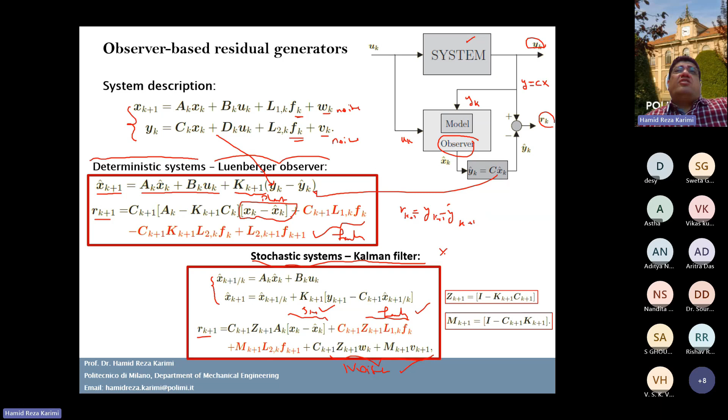So if you want to do the residual evaluation for a deterministic approach, for Luenberger it is very easy—you can use a fixed threshold. But for a stochastic approach, you can use different techniques like the weighted sum, scale residual testing, χ2 testing, or sequential probability. There are a lot of techniques developed in the literature, but basically it's all for residual evaluation, because after the evaluation you can take a decision and make a call.

Okay, so for the FTC architecture, as I told you, here we have a control plant. You need to do the monitoring system for the fault diagnosis, and then you can do some reconfiguration for the control part. Usually the FTC contains the FD, the fault diagnosis, and the control all together.

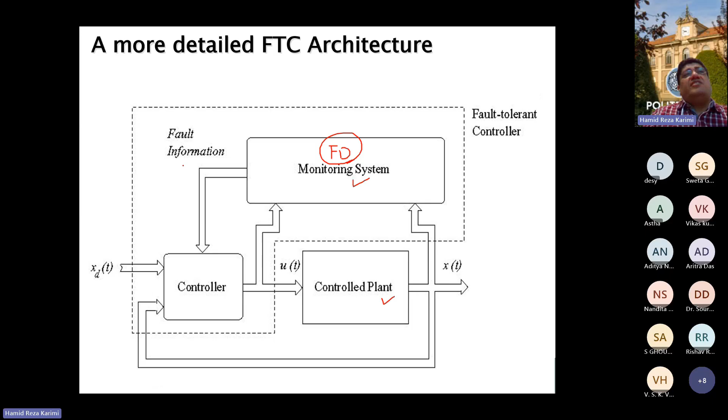You see this dash box. Then you can do the fault tolerant control, including fault diagnosis and also fault accommodation or reconfiguration. So if you want to see how we can do it for the FTC for a nonlinear system, you need to look at your measured data, XT, and also the control signal. You need to take this information to the fault detection and approximation, the FD, and then make some decision making.

Based on the decision making, once the fault has been detected, you can take it to the bank of fault isolation estimators, the fault isolation decision scheme, and the fault can be isolated. This information of the fault can also be taken to the control. So after detection of the fault, you can do some fault accommodation and also control reconfiguration, and then apply the control signal.

What does reconfiguration mean? Reconfiguration means that, let's assume you design a PID control, for example KP x, okay? Assume you use the P control. When you are using reconfiguration control, you need to change KP—you need to change it to another K. This change of the coefficient of the control is a control reconfiguration.

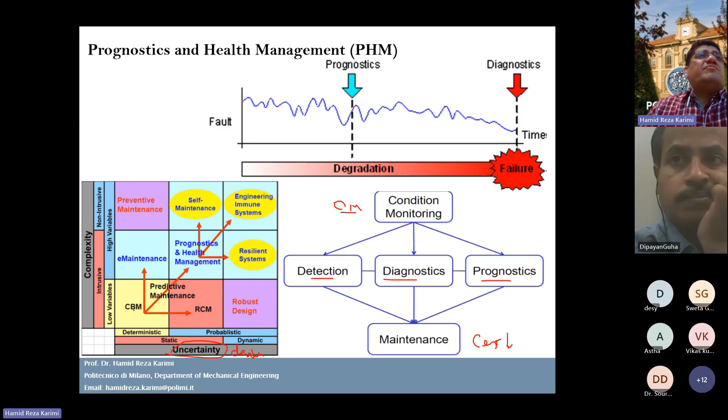So for low complexity with less uncertainty, you can use condition-based maintenance. But if you have more uncertainty, if it's stochastic, static or dynamic, you can look at RCM as reliability-centered maintenance, and also robust design. But if the complexity of the system increases, for example CPS with high complexity, then you need to look at e-maintenance for low uncertainty.

You need to look at e-maintenance for low uncertainty. You can use PHM, prognostic and health management, for this level of uncertainty. But if you have some dynamic uncertainty, you need to make the system more resilient. For non-intrusive complexity, with high variables there, you need to look at preventive maintenance, self-maintenance, and engineering immune system.

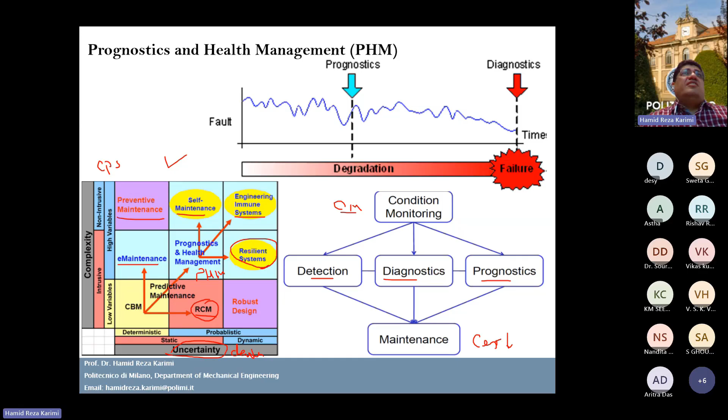So now you see that this table shows how to look at the difficulty in the data if you have some uncertain data set, and how difficult is the complexity of the system. Usually in engineering, RCM is a very important topic, resilient for more dynamic uncertainty. So these are the advanced topics we have in this topic. Of course I can stop here, but I want to show you some application, maybe later on if we have time.

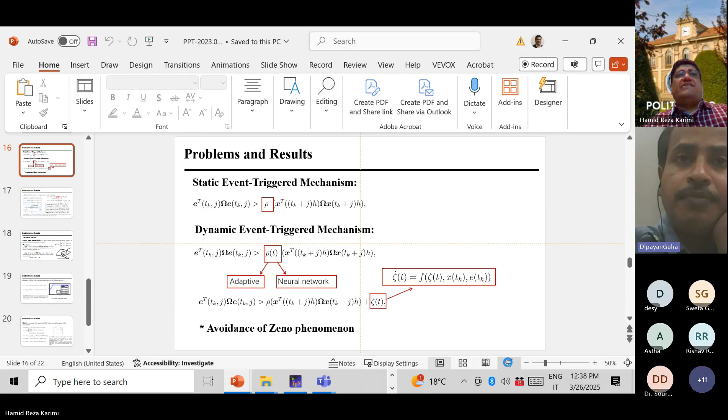Sir, actually I have a small query related to your previous discussions on dynamic event triggered. Somewhere you mentioned that the parameters through which this event trigger strategy is ensured, either that has to be computed adaptively or by neural network approaches. So sir, if I go with the adaptive updating of that parameter for smooth transmission of the data, then how can we obtain this dynamical equation for this rho t? Is this equation going to come from the Lyapunov theorem, or how can we go for the calculation of this rho t dynamics?

Okay, yes, it's a good question. So for the rho, you can either add some learning, you can add AI, so maybe you can use some adaptation. For example, you can say that rho dot is, for example, minus gamma rho, plus something. So it means that either you can use some learning part, or you can use some adaptation. These are some parameters you need to play with, need to use for the design. Usually this topic is learning based.

But sometimes the learning could come from adaptation, or sometimes the learning comes from neural networks, okay? Both cases are possible, but importantly you need to represent some dynamics. Dynamic means rho dot equals something, and this formulation is very explicit information. But some parameters should be tuned, and some parameters should be decided. But usually in the research, if you look at this publication I showed you before, you can see that these parameters, more or less, show some adaptation, and the rho is not constant. I think tomorrow I will show you some results, even for the self-triggering, and then you can see how effective the change of rho is in order to get a better result.

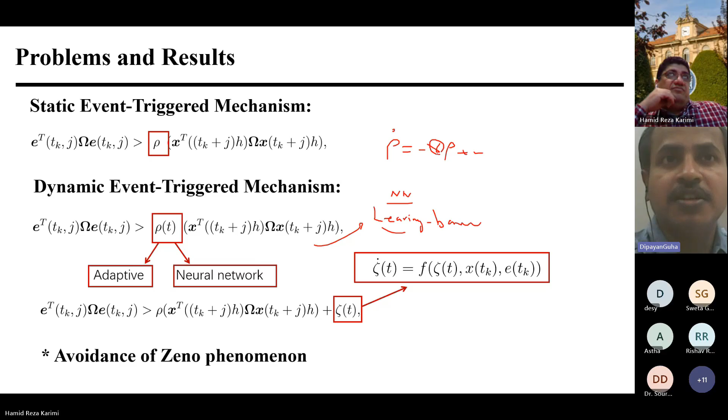Sir, it will be very helpful if you can share some references related to this dynamic event triggered mechanisms. Yes, I think you can look at this paper, you see. Okay, okay sir.

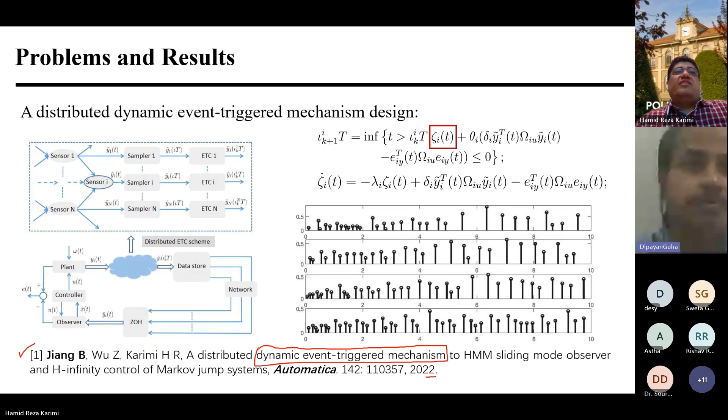Yes, I think I put some reference. This published in 2022 is about the dynamic event-triggered mechanism. Okay, any other question?